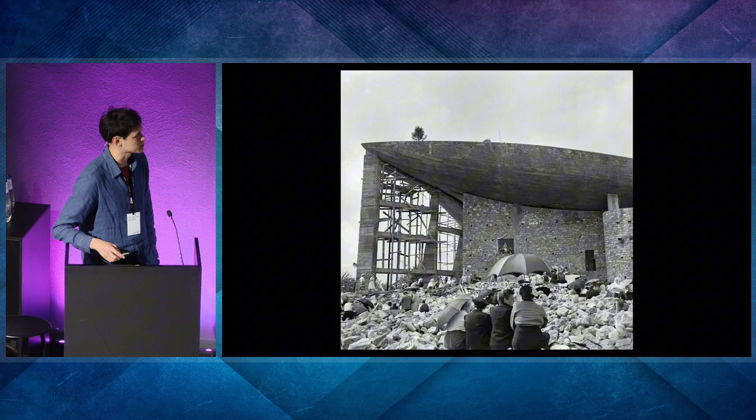Called Reconstructing the Rubble. And this first image here is a project that I think virtually every architect watching this will be familiar with. Of course, it's the Ronchamp Chapel by Le Corbusier, 1955. But I think a less familiar aspect of this building that you see from this image is the fact that it is constructed with the rubble stone of a previous church, which had stood in the same location, but which had been destroyed by aerial bombardment in the Second World War.

And I think this is a very interesting thing to me because while reusing destruction rubble or reusing the remains of old buildings was a very common practice in the pre-industrial era, in our own time, because of the kind of rigidness and prescriptive nature of construction technology, also because of building codes and other modern requirements to building, this practice of reusing materials is obviously much more difficult and far less common, almost never happens.

And there's a very nice line from James Stirling about this approach, which comes from an essay he wrote about this building in 1956 after visiting it. And it was published in the Architectural Review. The title he gave is Le Corbusier's Chapel and the Crisis of Rationalism. And again, speaking about the use of rubble to build, he says, in the USA, functionalism now means the adaptation of building to industrialized processes and products. But in Europe, it remains the essentially humanist method of designing to a specific use.

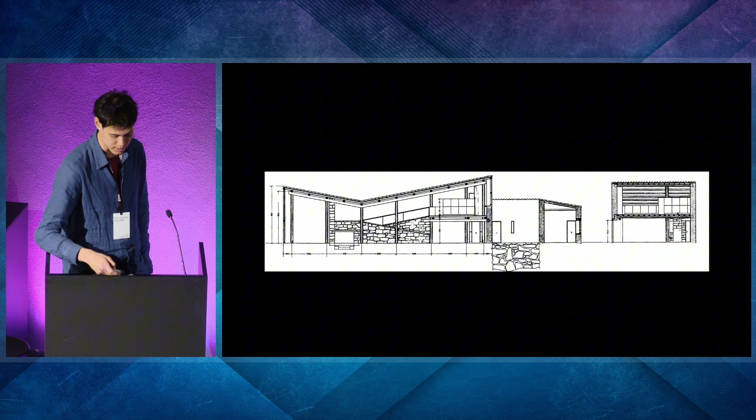The rusticity of the building materials, however, in no way acts as an obstacle to a clear plan and a modern expression. So again, we see here a functionalist justification of a building that does not quite look like what we expect from a functionalist building. In fact, functionalism and modernism kind of get mixed up; they're somewhat interchangeable. But generally when we speak about functionalism or modernism, we tend to go back to the somewhat limited definition outlined by Henry Russell Hitchcock and Philip Johnson in 1932 with their international style thesis.

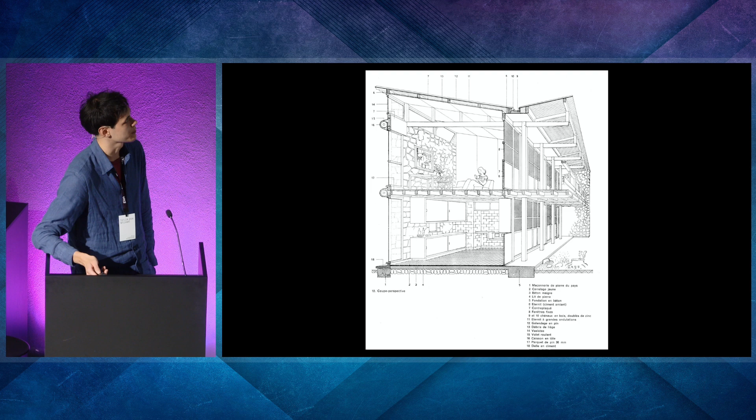But Hitchcock, in the preface to the 1966 edition of the international style, does say that this was really a big problem for them, and they included the building as a kind of exception to the rule, but admits that it was not very convincing. And I'll just briefly give this here. This is the Villa Le Sextant of 1935, and this is a drawing that was published in a 1940 survey called The New Architecture by Alfred Roth. I'm not going to read the quote for the sake of time, but he describes this as also a functionalist building.

So where I'm going with all this is that, within the framework of contemporary architecture that comes from modernism, we have sort of lost a certain flexibility, and we have very much returned to a more narrow understanding of how buildings can be constructed, and a more limited repertoire of techniques. Now, the fact is that we actually do exist within a world where we have constant warfare, we have natural disasters, buildings are sometimes demolished voluntarily, usually due to the pressure of real estate. And so we do find ourselves in an inescapable cycle of demolition or destruction and reconstruction.

And I think one of the great problems with this infinite cycle is the fact that we do now have this critical climate situation, which is manifested both through global warming, but also through the endless exploitation of natural resources.

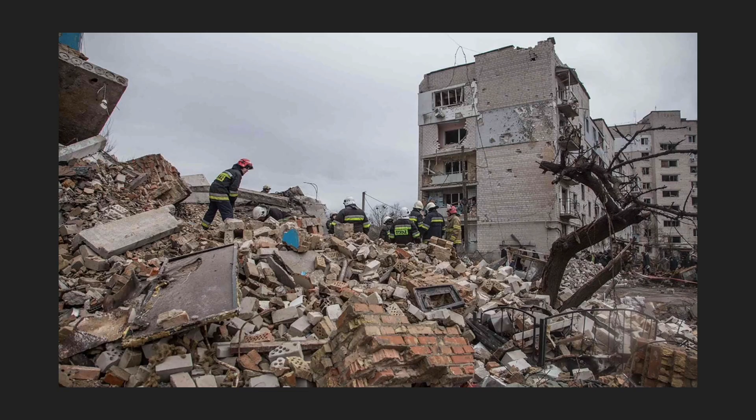And I show these images to show what kind of debris you get out of the buildings. Large pieces of concrete, you get concrete block, bricks sometimes, and a lot of dust. This is from Syria. This is from Ukraine. So you see chunks of brick. This is from Lebanon from last week.

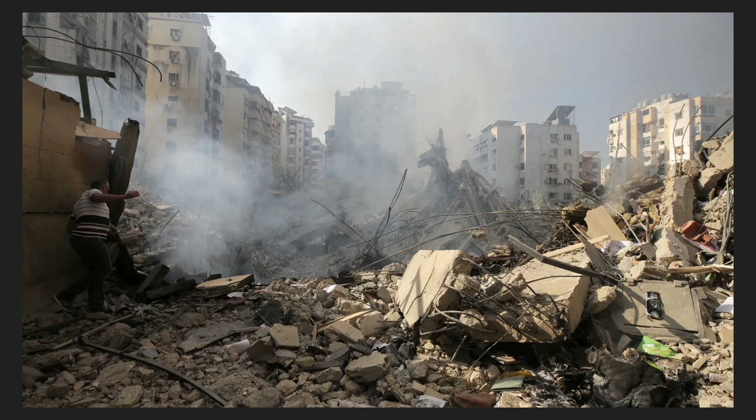So, of course, the obvious question that comes from this is, well, how exactly can we use this material? Because, after all, this is not as simple as piecing together stones like Le Corbusier did at Ronchamp.

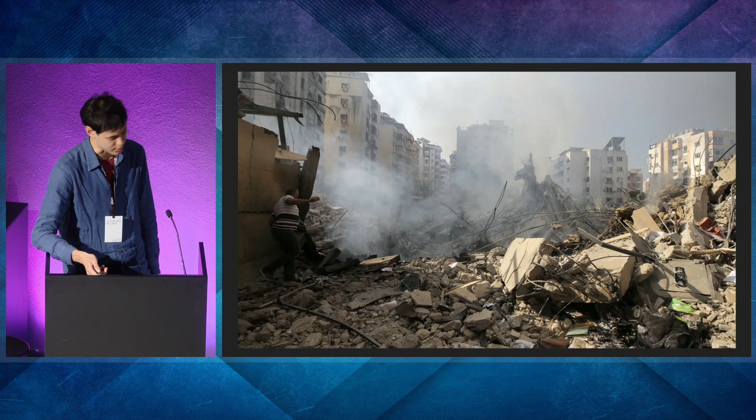However, as it happens, Corbusier, at the very beginning of his career, actually presents an industrialized solution to how to use rubble to build new buildings. He proposed asbestos boxes that you would take rubble. This is a project in 1919, so it's the end of the First World War, and you could pack it up into the boxes and you can assemble them into new buildings.

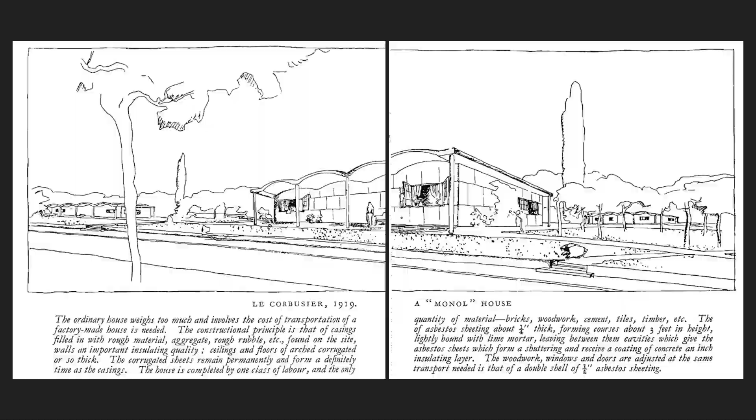What I was thinking is by no means a new technique, an old one, is the use of gabion walls. A gabion is a kind of a mesh cage that you pack in stone or other hard materials. Oftentimes brick is also used. This is usually used for civil projects, landscaping, retaining walls. But there have also been examples where people have experimented using this in buildings.

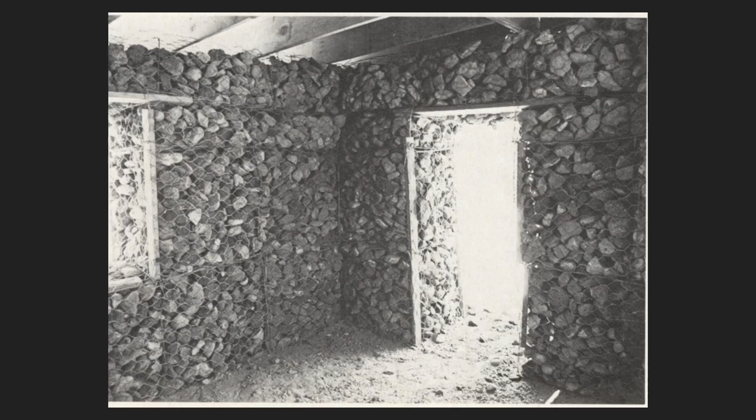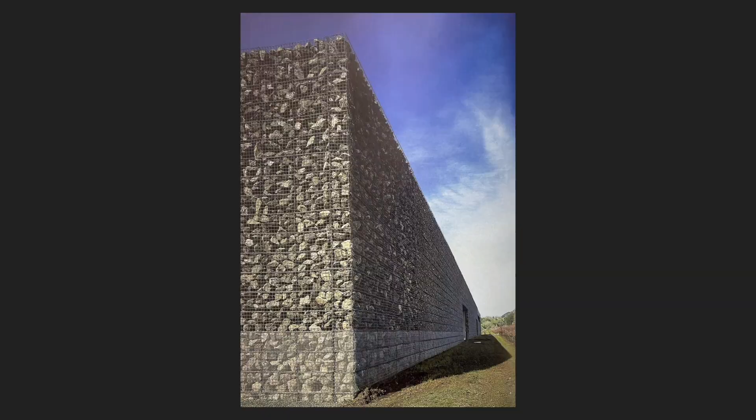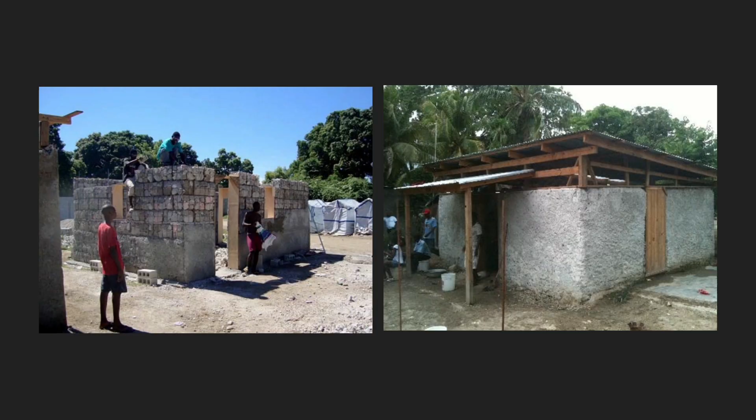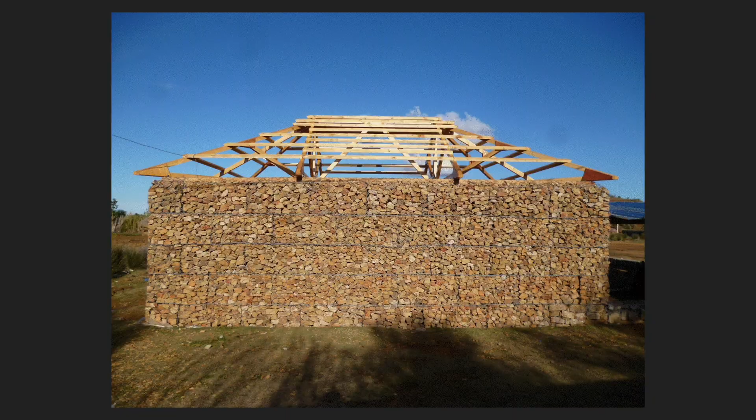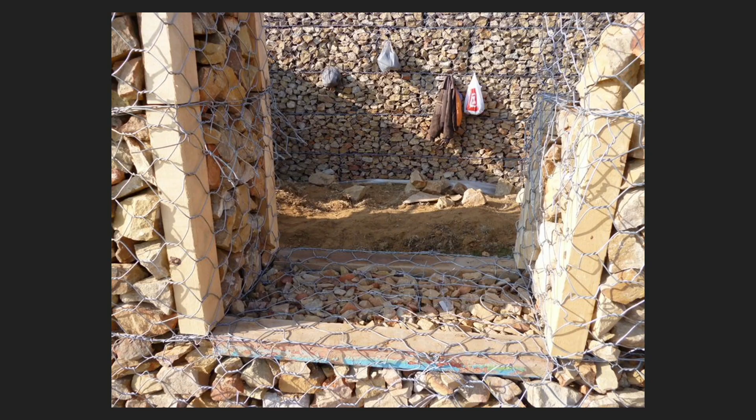These are gabion houses that were built in Haiti in 2010 after the 2010 earthquake. These are load-bearing gabion walls. This is an experimental building by the architect Doug Eichelberger in Colorado, using load-bearing gabions. This is a building in Morocco. It's a women's center. This is a construction photo, of course. The roof has not gone on yet. And you can see, again, load-bearing details from that.

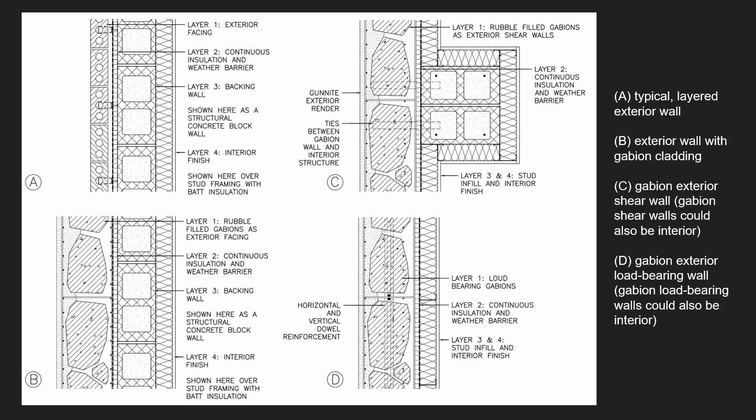So, as you can see, most examples I gave of the load-bearing gabion are for humanitarian purposes or smaller buildings. I think this has to do with the fact that in the developed world, we preclude certain techniques, thinking that they're not appropriate for our society, while at the same time thinking they are appropriate in other, say, less wealthy countries. I do think there is opportunity for us to study how these techniques could be used in what you might call more ordinary circumstances.

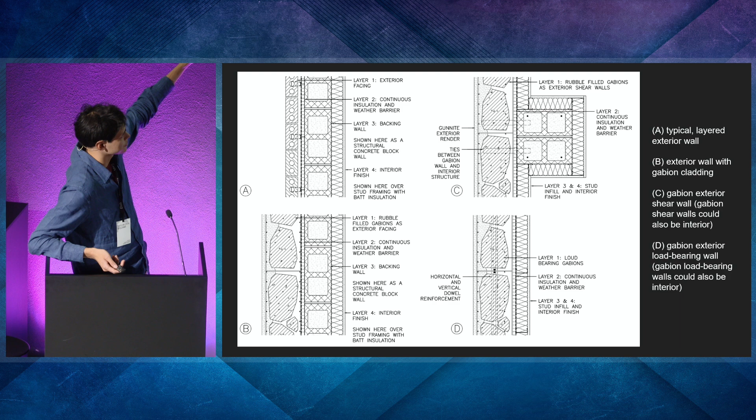And I propose three, but you see here four. A is just a standard wall with brick cladding. B shows you could use rubble as cladding as a kind of encapsulation technique to reduce landfill. C is a hybrid approach where you could use the structural properties of gabion walls combined with more conventional structure if the gabion wall itself cannot be load-bearing. That's probably most likely for code reasons. And D would be the idea of using purely a load-bearing gabion wall.

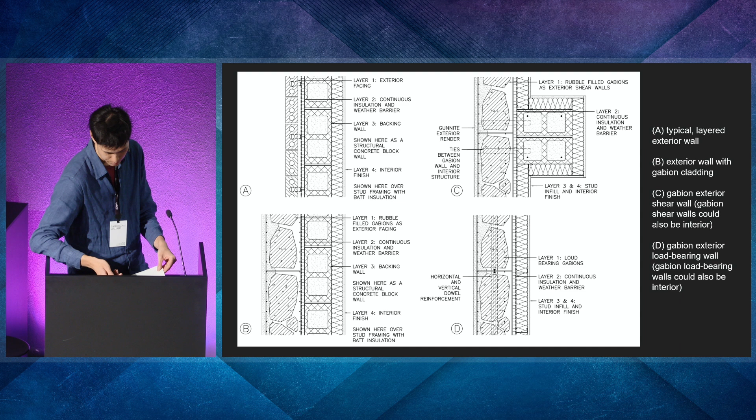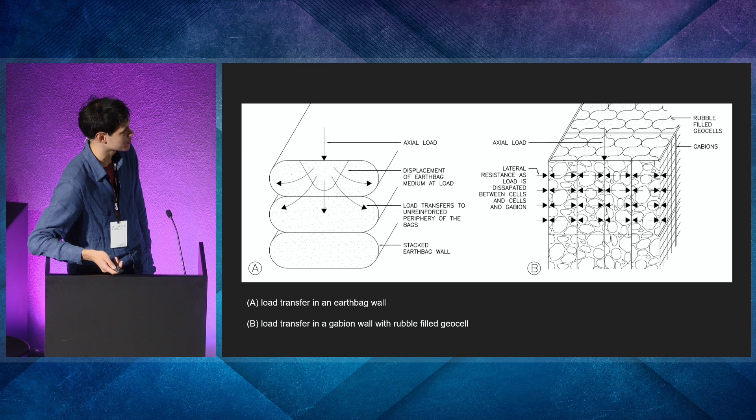Just very briefly, because you'd also get a lot of dust and smaller debris in these situations, I was also thinking you could use geocells and combine that with earth, so you could still use that finer material to build up a wall. And this diagram shows B is a geocell gabion hybrid, which I think is a possible way to build an exterior wall for a building. And I'll leave it there. It's just a drawing of the whole idea.